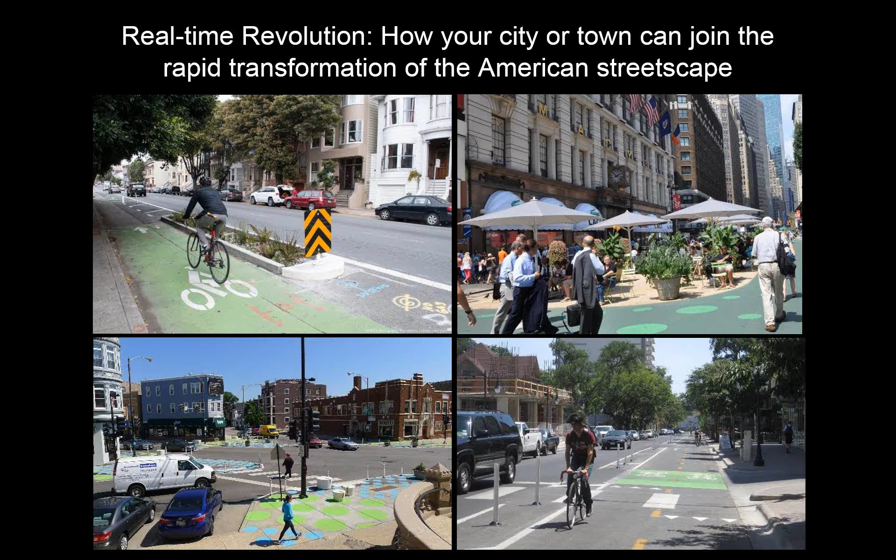One of the interesting things in looking at this phenomenon of using techniques, paint and objects that are easily moved and easily installed, is that it's so new that we don't really have a clear name for it yet. That's one of our challenges in this research.

Some people call it rapid implementation. The New York City DOT, where I used to work, called them operational projects to distinguish them from capital projects. Some of the writing about the public space aspects of it has referred to it as tactical urbanism, which is a catchy name, though I think it misses some of the strategic significance of what cities are doing with these techniques. NACTO's Urban Streets book calls them interim design strategies, which kind of implies that somehow these are going to get built out in more robust ways after the paint and object stage.

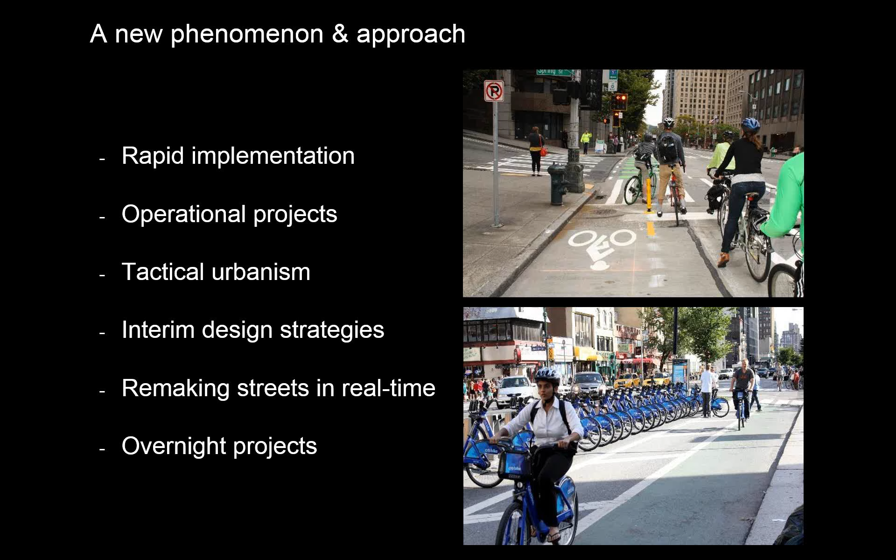I've been using the phrase real-time transportation projects as I've been writing up some of the research, but we haven't really had the conversation and decided what we want to call this so far, whatever quick time frame you want to use. There's a lot of discussion about what to call this, and we'd love to get some more input from you folks who are in different jurisdictions working on these ideas, to think about what we should call this, because it's good to name it, and it can only help it spread and improve as we go. Next slide, please.

One of the interesting things about a lot of this is that it did grow out of many cities' desire to make bicycles a real and viable and widespread form of transportation. And I think that's kind of natural.

In a lot of places, their bike programs were basically a piece of the markings program, because bike lanes tended to be just indicated in paint. But as demand grew and officials realized cyclists in cities need a little bit more than just a paint stripe, these programs started to evolve from simply markings to what can we do to make this more robust and make people feel more comfortable and protected on the street.

And then once that happened, there were cities that said, well, we can actually be doing even more with these kind of techniques - it's not just about cycling. What's also interesting that we're finding is, yes, there have been mayors who've come in, like Rahm Emanuel, and said we're going to make this a bike-friendly city - and the current leadership in Seattle is another example - but there are other ways that these things got started and acquired tremendous momentum in other cities.

In some cases, a mayor may have said, yeah, we're interested in this, but without really realizing or driving it personally, and you get ambitious transportation leadership, as we had in New York in the Bloomberg administration, who took hold of some goals and some openings and then showed real success with a few early projects that convinced the mayor and city hall leadership that this was a winner - and not just politically, but from an objective point of view, with bike ridership numbers going up, crash numbers coming down, and more people demanding these things.

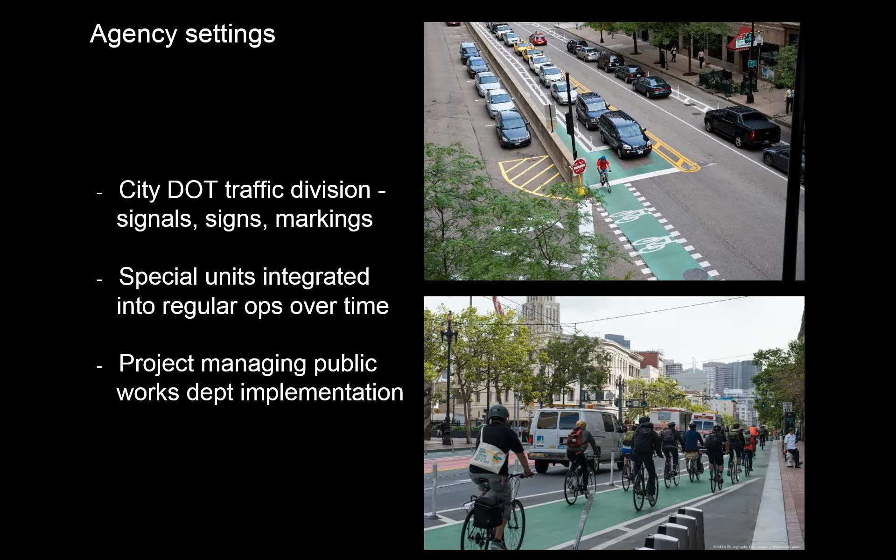Where these projects are coming from, some of these things are now advanced enough that there's a regular rhythm to them. You can see that in New York, Chicago, San Francisco, a few other examples - a regular annual program. These things happen quickly enough that you can go from conception to finished project on the street within 12 months. So you often have people in traffic ops or planning creating the project in the late fall and over the winter, then shifting into project management mode to work with implementers in the spring and summer, and then going back into that rhythm.

It's good because other stakeholders and constituencies in these cities are now perceiving the rhythm. You'll have aldermen or city council members or local elected officials starting to say, oh, we need some of this in our district, and I have some discretionary money in the budget. So you're starting to see synergy as other players perceive this rhythm and understand you can get something fairly quickly in your streetscape, because of the accessibility of these programs and the fact that you can go to realization so quickly.

The variety of sources that project developers have relied on over time - some cities have come up with their own design guidelines in the absence of anything else. But after say 2010, 2011, as the NACTO book started to come out, more cities have gone to look at those things. They don't talk so much about the techniques, which I think are largely still held as knowledge in-house - how to do the paint, how to do quick concrete work and meld it all together. But the geometries are coming now from the NACTO books and from earlier guidance that cities were developing on their own.

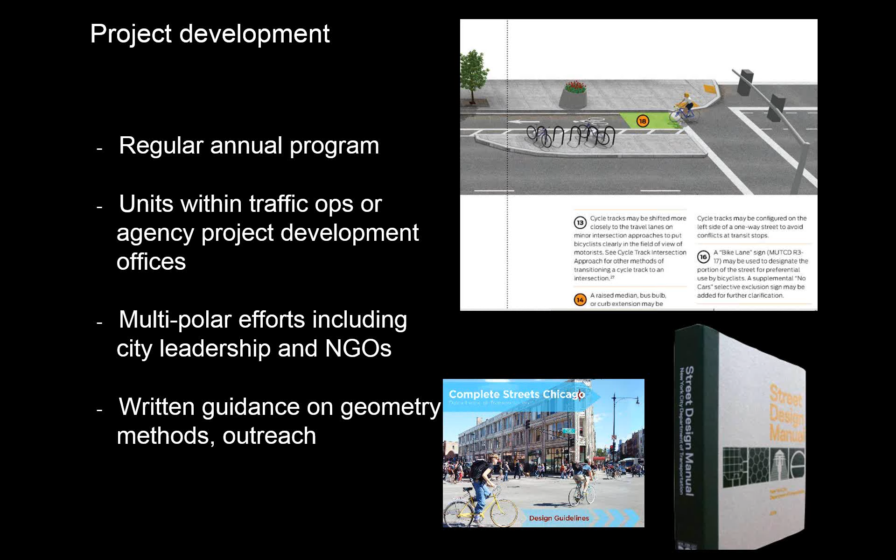When you talk about bike and ped projects in the U.S., you often get into this litany of federal categories we're all pretty well aware of - transportation alternatives, and before that transportation enhancements. Some places were able to use CMAQ funding and other flexibilities built into the federal program. But when you see places doing annual programs with anywhere from half a dozen to 50 projects a year, you see a real variety, and a lot of it is exploiting available local funding that's a lot easier to use than the usual federal categories that bike ped discussion centers on.

In some cases, if you're in the traffic operations area, you can just start drawing from your basic budget lines, like marking signals and putting resources into signaling and marking streets differently. So that's whatever you're using there in terms of local, state, maybe some general federal categories to do those things - you're just repurposing some of that funding.

In other cases, there are monies becoming available as these programs are defined or addressed by leadership. In New York, there was a sustainability category that came along with Mayor Bloomberg's first push on those things in 2007, and that really helped boost some of the cycling and public space projects. Voters in San Francisco recently added a bunch of money for safety, so some of the quick action Vision Zero projects are finding more resources, and the number of projects per year is actually increasing.

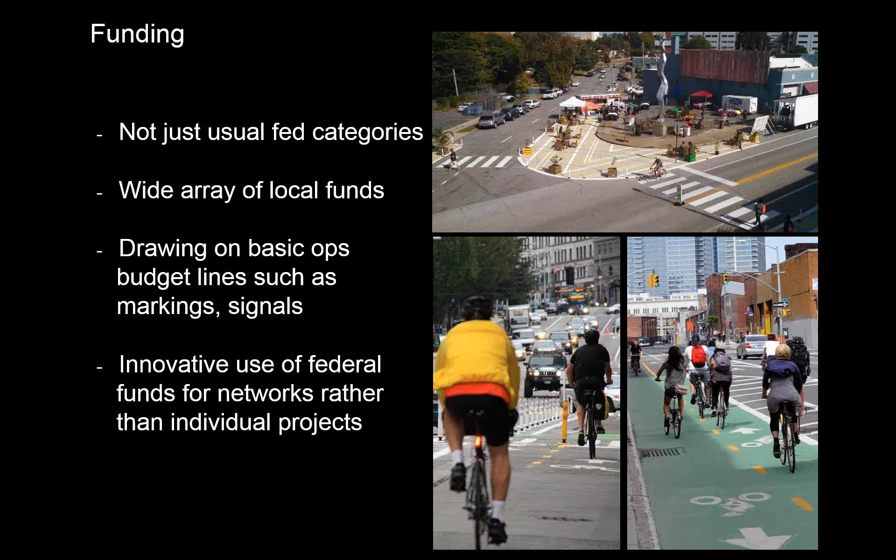We mentioned NACTO calling these interim design strategies, with the implication that these projects will be built out in more robust materials over time.

As a construction project, this is very atypical, not just in New York, but around the universe of these projects. There are places where the paint and object stage is seen as a known phase one that will have a follow-up. But in most cases, it's not given, and cities haven't sorted out a clear timetable or even a clear sense of whether they want to do that, or whether a lot of the bike network will be kept in these operational materials and just refreshed as needed.

There is no lockstep, and there are so many projects being built. It would probably be hard fiscally for the capital pipeline at this point to catch up and accommodate these, absent some major funding steps. So this issue is a little bit all over the map.

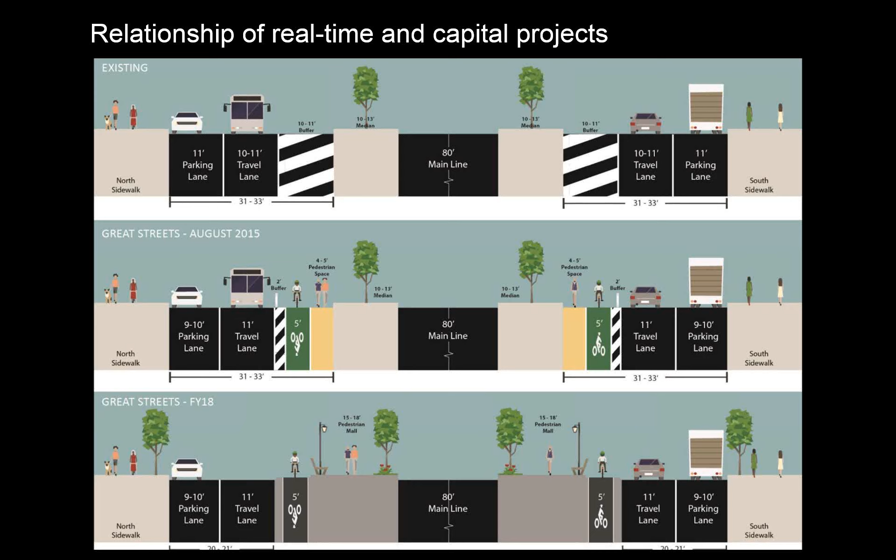This is just one example in New York where there was a capital project coming behind the painted project on Allen Street in the Lower East Side, and you can see the median-side bike lane. On some blocks, it's still paint and cross-hatching; on other blocks, it's a beautiful landscaped bikeway, and that will succeed over time. But again, this is the exception rather than the rule we're seeing so far. I think some places are trying to go fast and get real networks and real safety results down on the ground without worrying yet about how you build all this stuff out over time. So I think we're still in a very pragmatic and early stage in considering these things as city infrastructure and what their longevity might be.

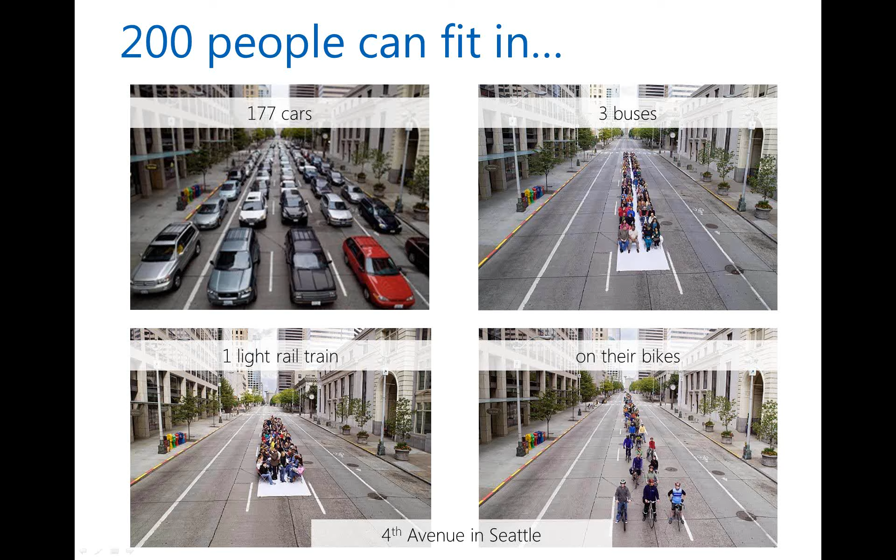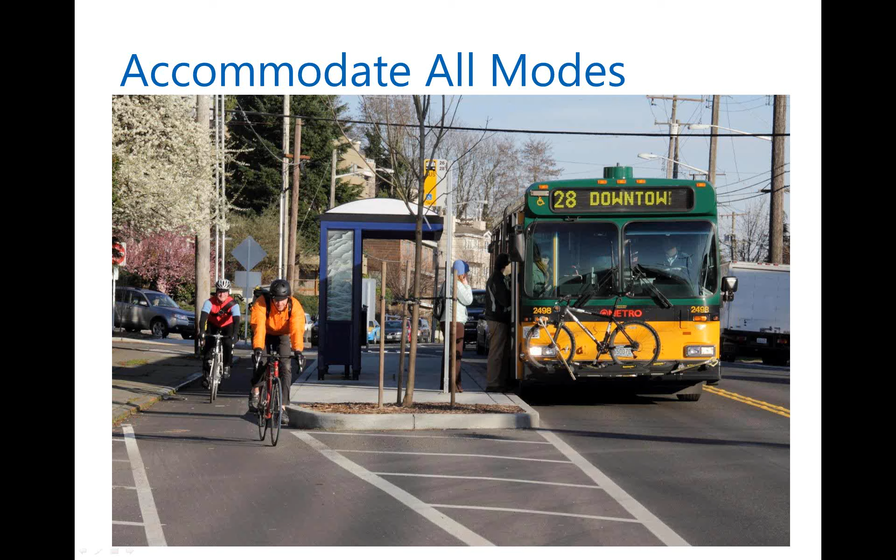We have to be creative about how we accommodate all these modes in a confined space. Here's an example on Dexter Avenue where we've prioritized bus travel on the corridor and provided a pathway for bikes as well, really thinking about flexible use of the right-of-way.

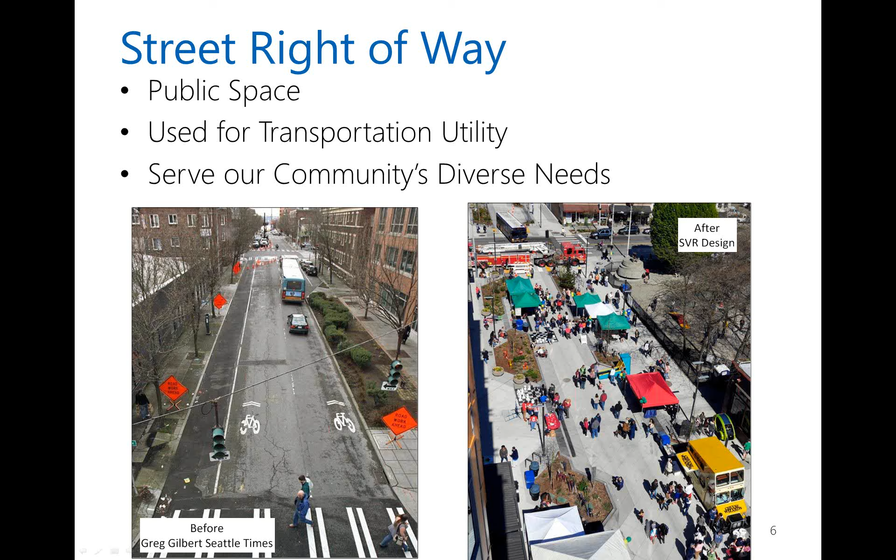This is Bell Street, 4 blocks in downtown, where we need the capacity during the day, but during off-peak and weekends you can repurpose it and use it differently as the community grows and needs space to gather and enjoy the amenities. You can close a block or two to create a different place and have a right-of-way that's really flexible.

Seattle adopted Vision Zero in February, our plan to eliminate fatalities and serious injuries by 2030. We do that through street design that prioritizes safety, engaging the public with education, and targeting enforcement to change behavior. So what's going on in Seattle?

We're seeing a very safe city, one of the safest in the nation for walking and biking, second safest for that. And our collision rates are actually decreasing.

But if you look at serious injuries and fatalities, a disproportionate portion is borne by people who are walking, biking, or riding a motorcycle. Collisions involving those groups represent 5% of total collisions in Seattle, but that 5% represents 50% of the fatalities.

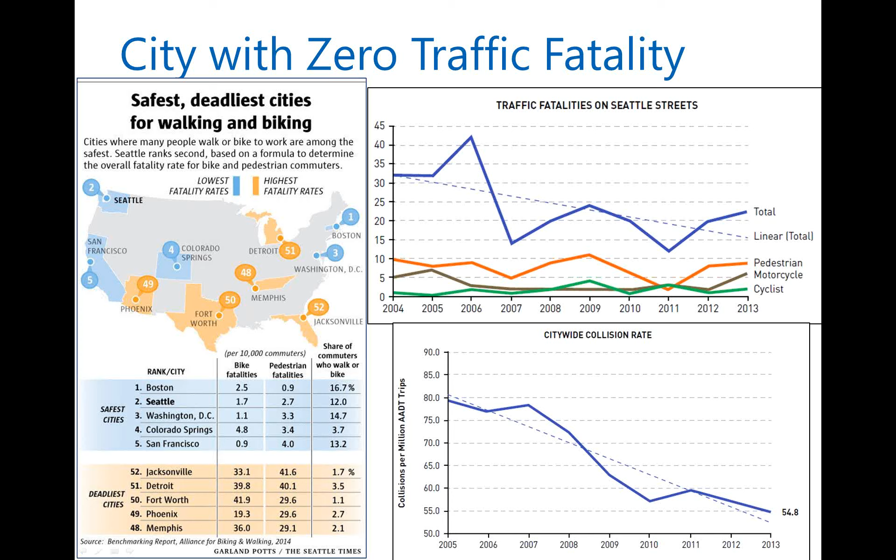So it tells us where we need to look at our data and make a difference in driving that down to zero. So why protected bike lanes? Because the risk of injury drops significantly, 90%, by putting in these facilities.

It encourages ridership, especially among people who want to ride but are wary of heavy traffic. It also creates predictability for everyone when you have a nice facility that's continuous and easy to use.

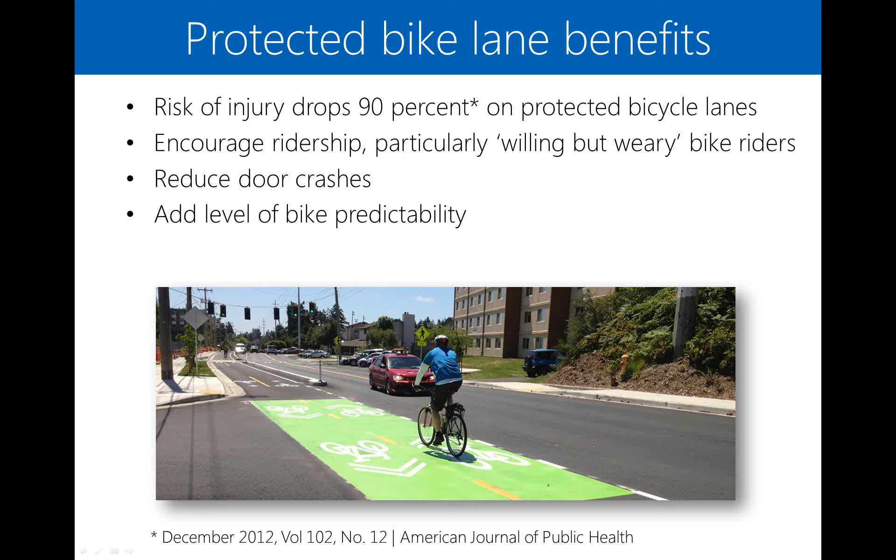As we were doing our bicycle master plan update, we were told by some reasonably polite Seattleites - a couple folks came in the dark of night and gave us a very strong lesson in what we need to consider as we put in our facility.

On Cherry Street, they put some flexible posts in under the state interstate and showed us that with very minimal cost and investment, you can actually make a significant difference.

We took that to heart and worked with our state DOT to create a design we could test out. That same flex post is actually still in place currently, and it's been very robust, it's worked out really well.

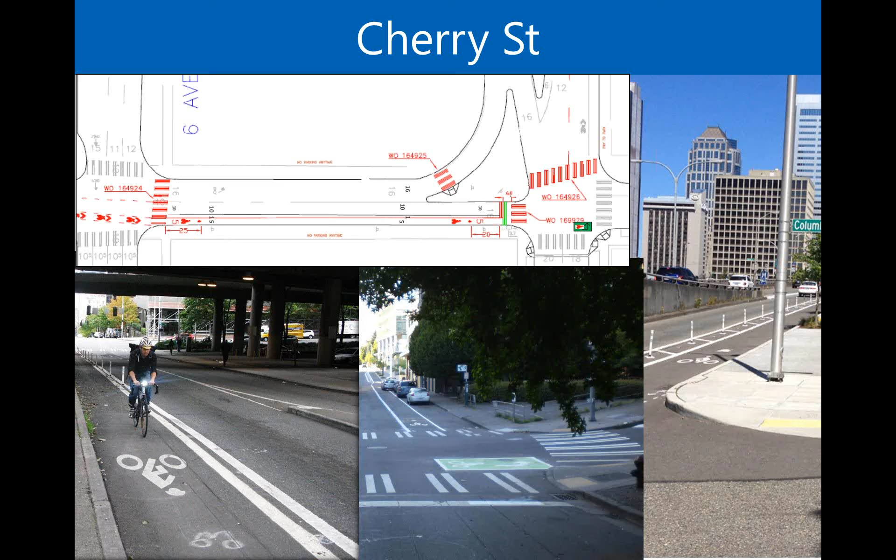We took that opportunity to think further about how to take people on this facility to a safe place. So we created a two-stage left turn box at the interstate on-ramp, with a bike lane that comes into a protected bike lane on the next block over, just to see what a protected bike facility might look like.

We have a bicycle master plan, updated in 2014, that really took the community's voice into our plan - protected bike lanes, residential streets that are calm, low speed and low volume. Those are the facilities the community asked us to put in, and our 5-year implementation plan is doing exactly that, building those facilities.

The funding for most of our bike facilities is currently from the local Bridging the Gap levy, which ends this year. So we'll be going to the voters to see if they'd like to invest in further improvements in the future.

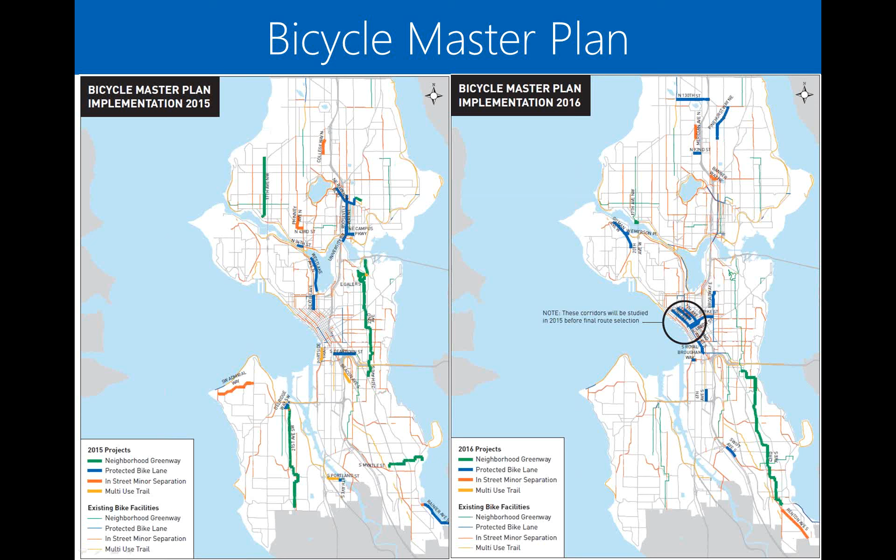We have our implementation plan updated annually online, so everybody understands what projects we're working on and how priority locations are selected, so we can work together to develop a network that's connected, predictable, and usable.

Our second project: instead of flexible posts, we decided to use metal barriers - a zipper barrier we salvaged from a construction project. Our bike plan called for a striped bike lane on this facility that ran from the Burke-Gilman Trail to Magnuson Park.

If you think about families riding on the Burke-Gilman Trail, riding on an on-street facility down this hill onto the park probably isn't the best idea.

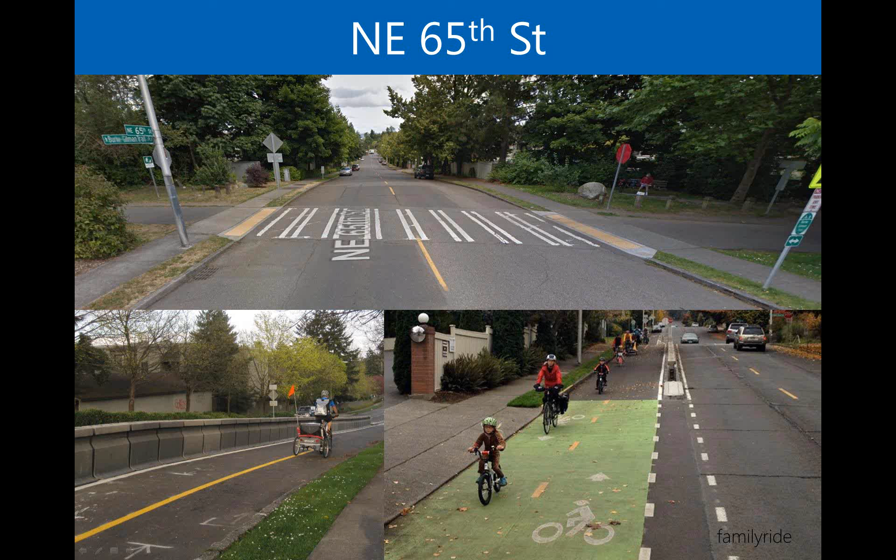So we took the salvaged metal barrier and installed it, and the result is a very comfortable place that's opened up the facility in connection to the parks. This is what it looked like before and after - you can see the crews installing the green bike lane.

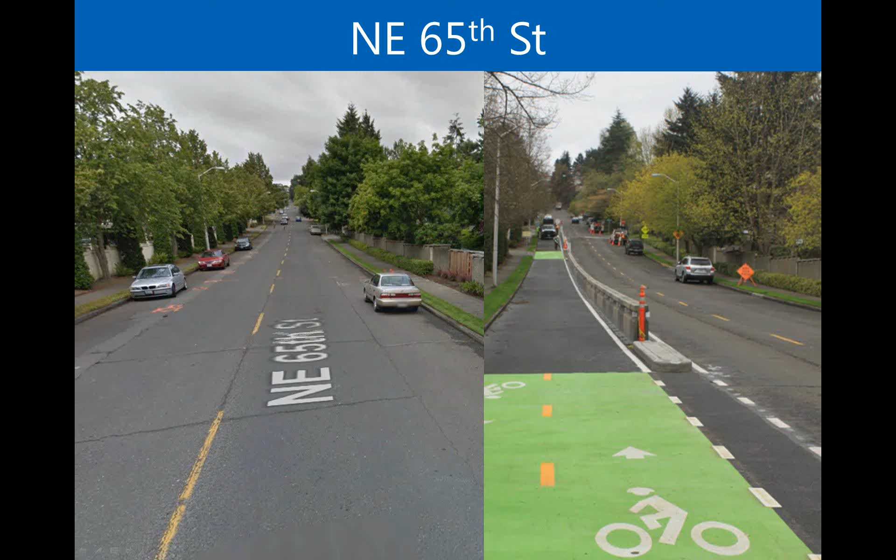It's really about how we prioritize and repurpose our streets. And again, it allows for a larger population of our residents to use this facility.

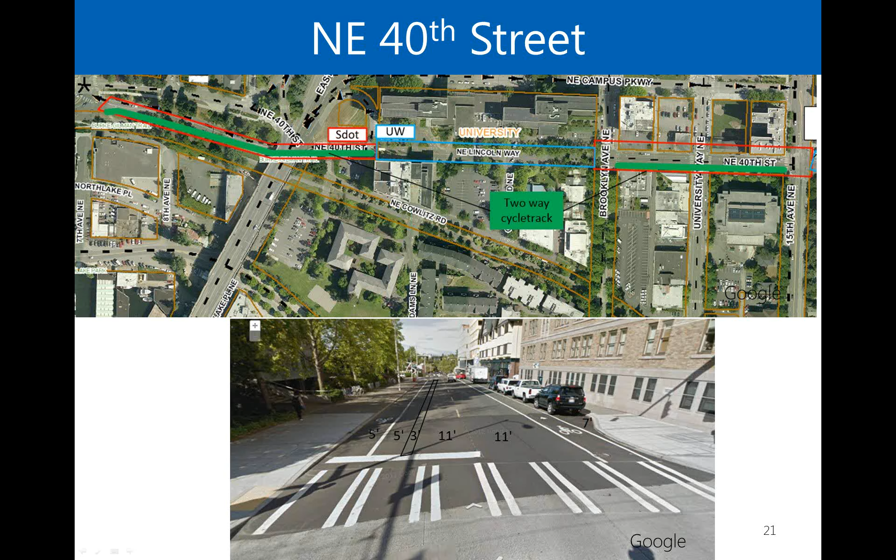This is 15th, where the major campus is, and you can see how congested that location is with buses and pedestrians. So this is the project area. The picture down below is what we did - we took the bike facility and switched it, putting it on one side of the street. We put some fresh pavement down, and at this intersection where the major connection to the university is...

This is tactical. All we did was add a third phase, an all-walk phase. It was a two-phase signal, east-west, north-south, and all the turning buses were turning across all the pedestrians - not the most efficient or best way to handle this intersection. Now, providing this all-way walk, you can see after we turned it on, everybody understood how to use this facility. Much safer, and it's working much better.

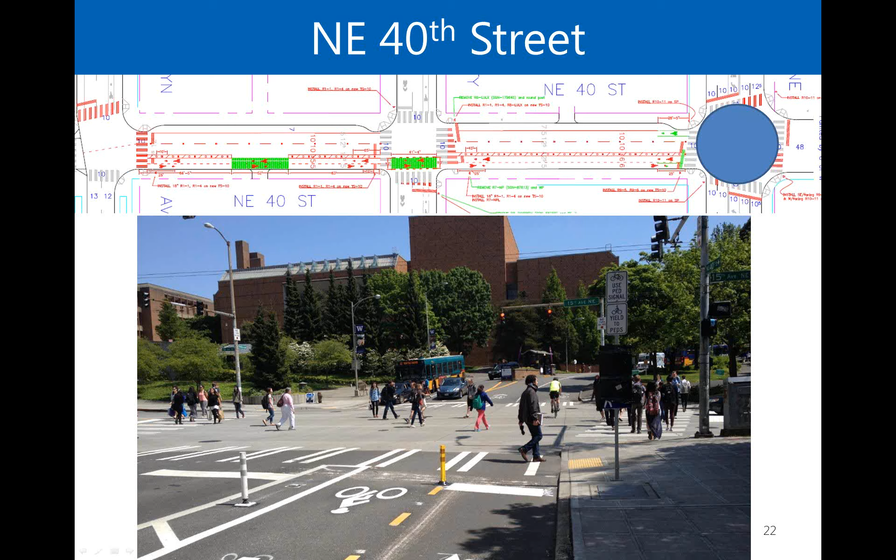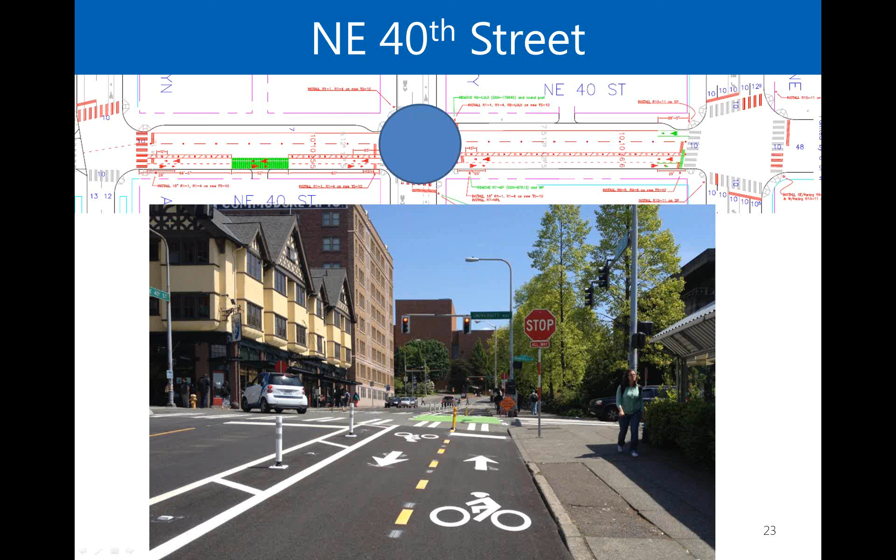This is the next intersection over, where we had a signal, and we took the opportunity to put the signal on flash, pull back the walk heads, and put in all-way stops. Now we've created an intersection that's really prioritized for low speeds and pedestrians - people have the ability to cross very safely.

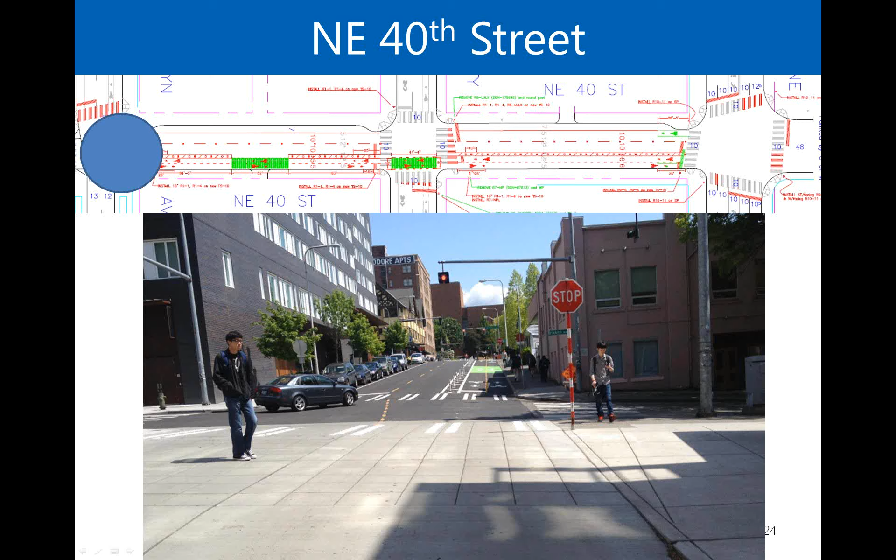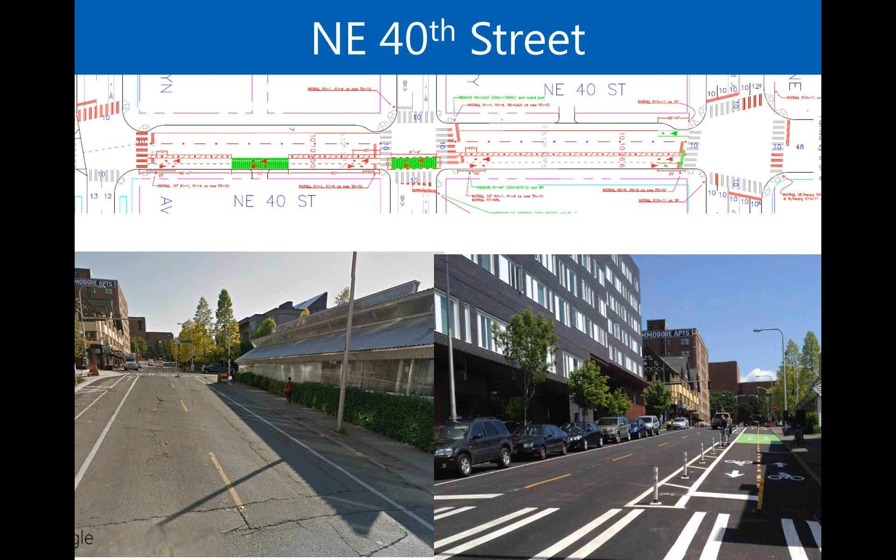This is the far end of the intersection at Brooklyn, where it's again an all-way stop that goes into the main campus housing. Before and after, you can see a huge, dramatic difference - some folks used to cross in the middle of that intersection. Now you create a buffer for people who don't have much sidewalk space, so they're more comfortable not being next to a vehicle lane. And you get these types of riders - kids, families - which is what we want: to encourage and have our facilities available to all users if they'd like to try it.

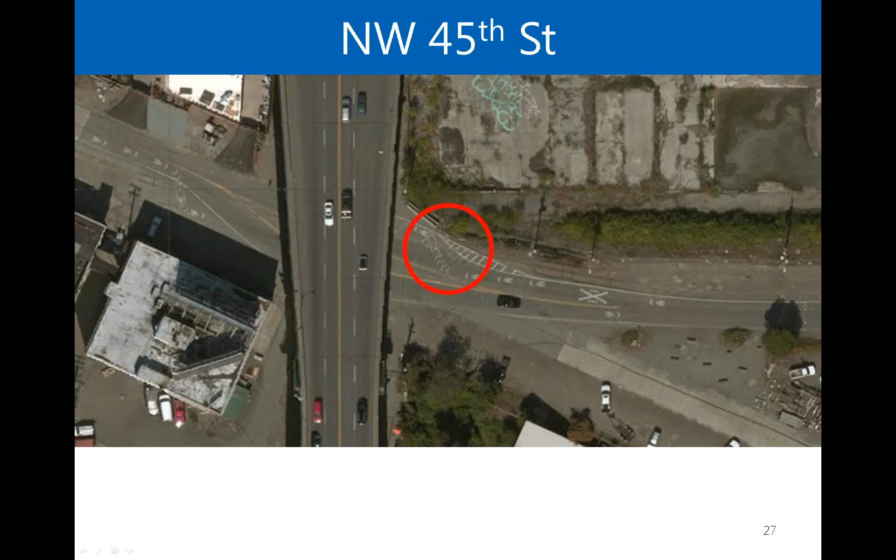This is another location where we had a safety bike fall at a railroad crossing on the section of the Burke-Gilman and Missing Link Trail. We took the opportunity to create a two-way bike facility in the interim, until we figure out how to build the permanent trail facility. So we took a two-way facility and made it a one-way facility, put the bike lane in so that it's a bike path, and we're getting families traveling through that corridor safely.

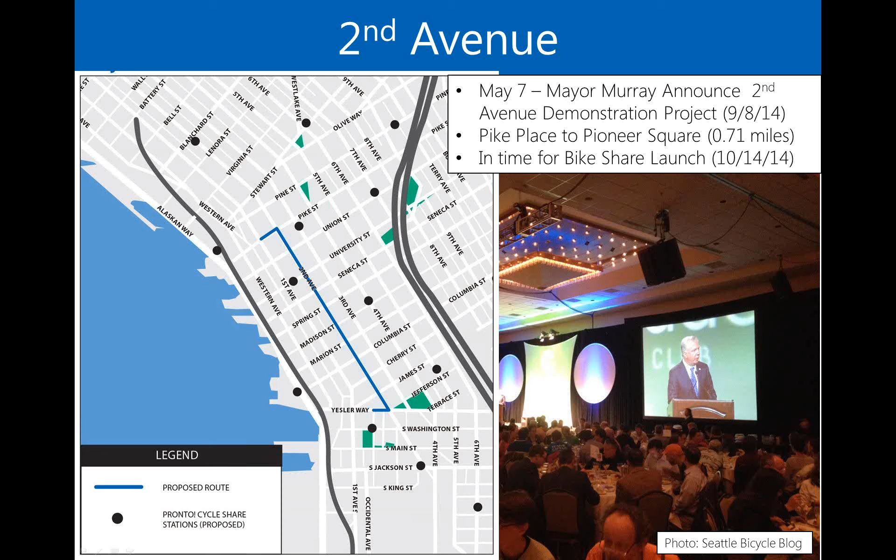On 2nd Avenue downtown, our mayor announced at the Bike to Work breakfast meeting in May that he wanted a protected bike lane in downtown before the bike share opened, which is obviously a big facility for us. So we did this project within a 4-month period - we had it in our 2-year plan. And this is what it looks like. It's a pretty daunting location with difficult turning.

We had 61 collisions. 50% of those collisions occurred at this type of condition, where at the crosswalk there's a left hook.

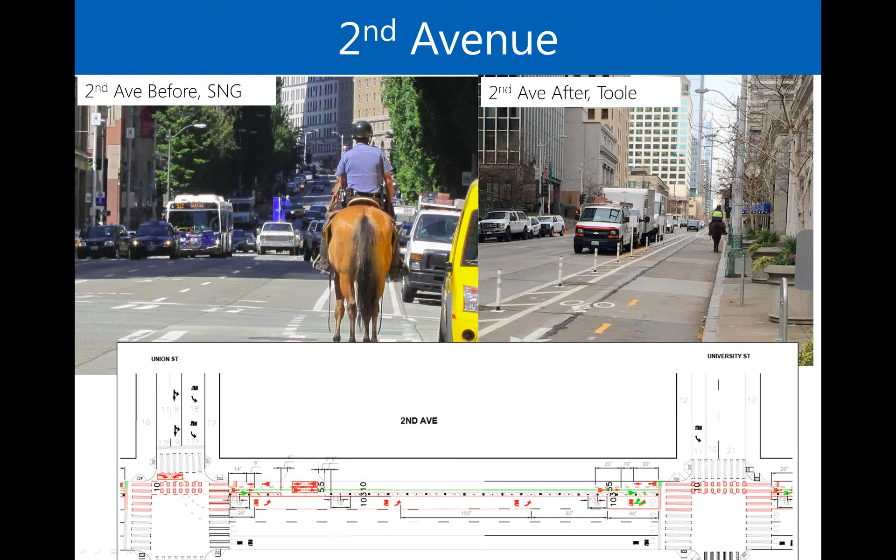This isn't just before and after. You can see a police horse looking up the bike lane and thinking, wow, this is a daunting task. And afterwards, again, just repurposing that space for a better and safer organization of traffic.

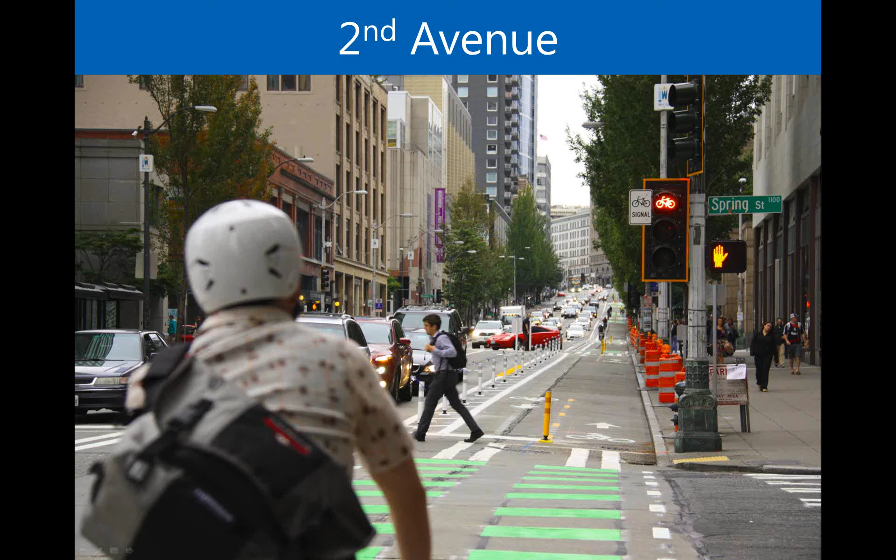What we're seeing is just the repurpose of the street. We're using that curb lane for parking during the off-peak, and then stripping it off during the peak for a travel lane. And I'll share with you the results.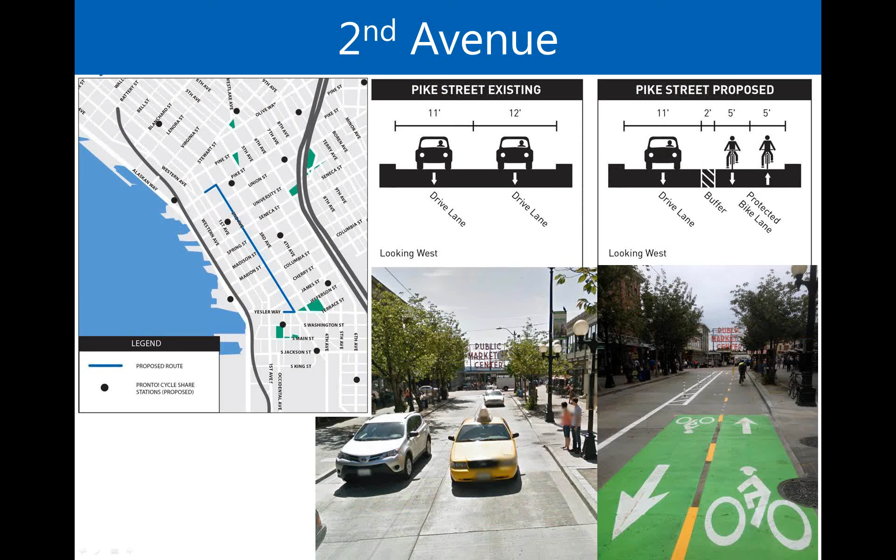At one end of the facility, we're connecting to Pike Place Market. We took the two lanes and changed one into a bike facility into the market. The other goes into our Pioneer Square on Occidental Park, where we took one of the parking lanes into a two-way bike facility. We also made some improvements at the signals, bike signals and left turn lights.

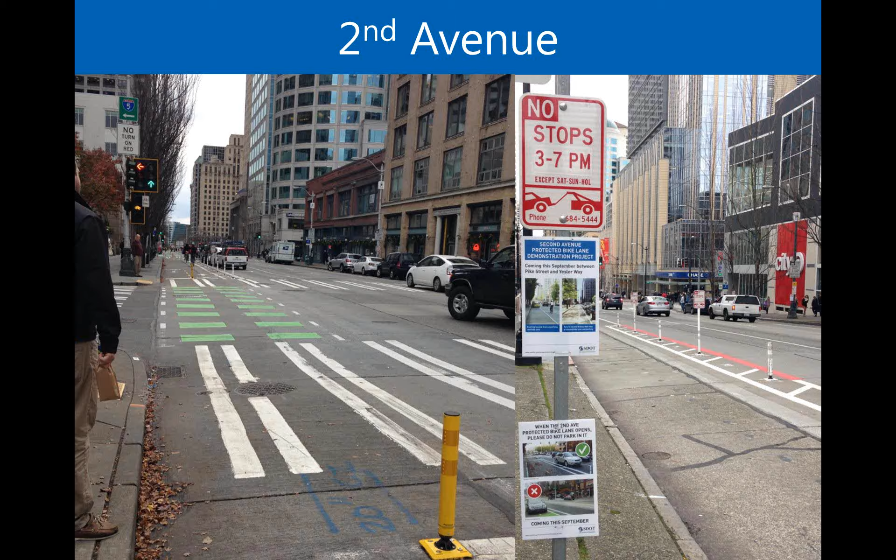This is some outreach that we were doing to get the information out. And the results: we've seen a dramatic increase from 272 bicycle riders to 1,100 in the first week. In May of this year, we had 1,600 bicycle riders, almost a 500% increase in bicycle ridership.

So it's been a very successful implementation. People are using it, and there's been a result on the vehicle traffic.

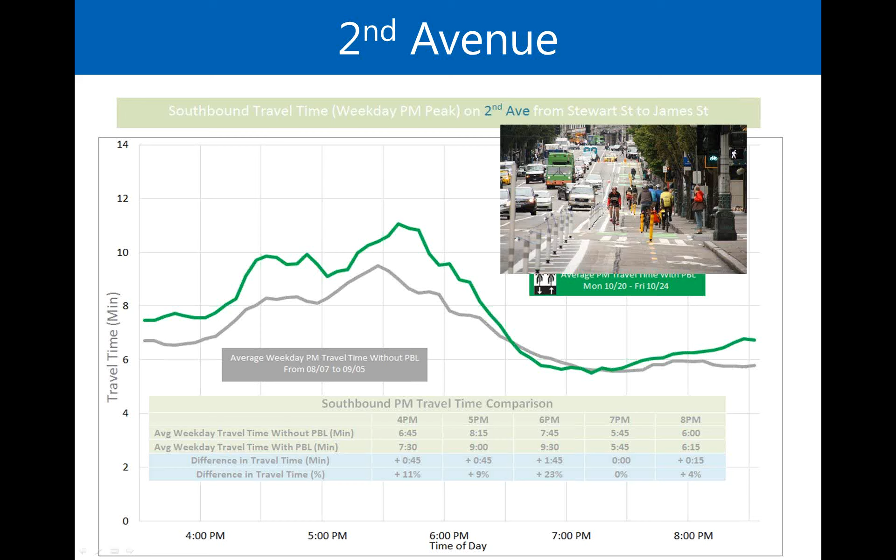You can see the before and after. PM peak is really the critical time for us, where everybody comes out of the parking garages. And the worst of the worst, you can see it's about 1 minute and 45 seconds difference just beyond the bicycle facility. We're looking at the corridor from Stewart to James, and the bicycle facility is only on a portion of it.

So again, it's been very successful. Our bus performance was something we were concerned about, and the data has shown that there's actually been no real impact to the buses.

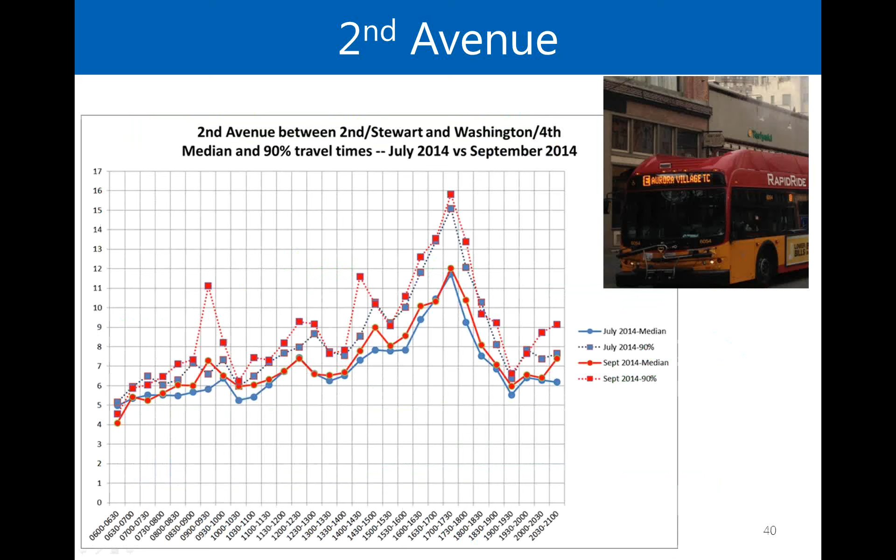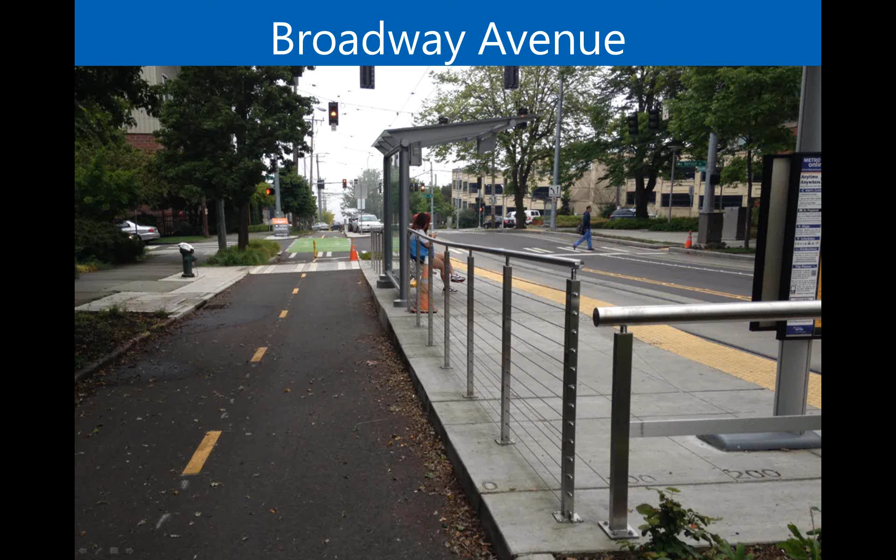And again, it's really about the tools that you have. It's very easy. This is a location in Seattle Center where if you wanted to cross from one corner to the other, it was a very daunting task. We put in a crosswalk on the diagonal and added an all-way walk.

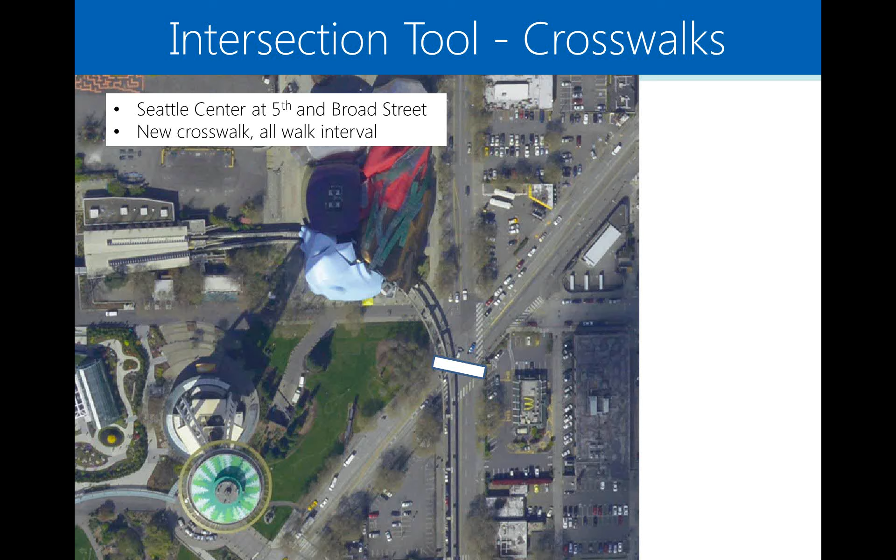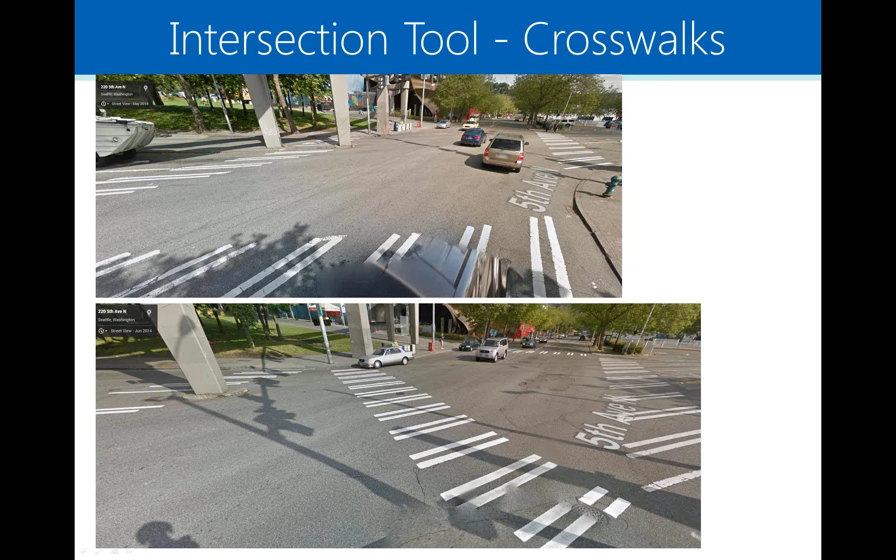This is what it looks like afterwards. Just some striping and a signal phasing change. Definitely a big improvement for pedestrians, and it also helps with vehicles. And again, paint and post—very low cost, easy to implement, and quick.

So that's my presentation.

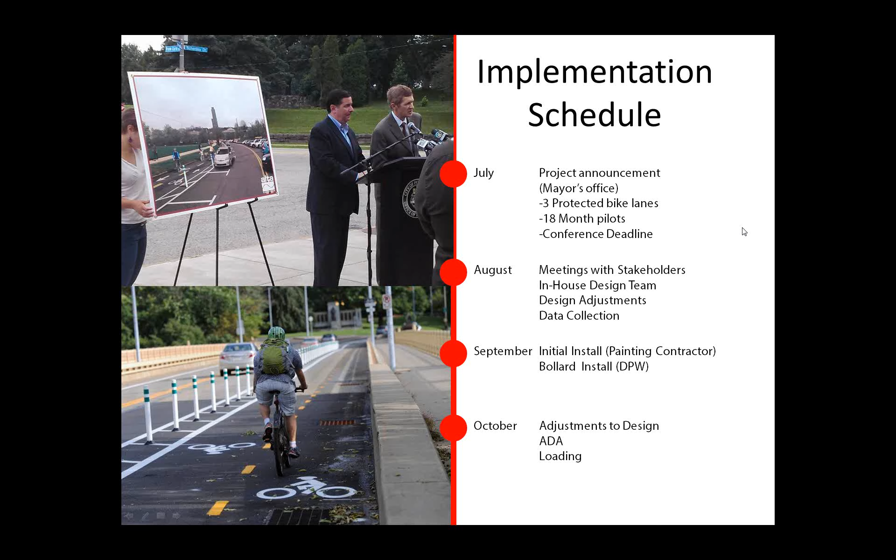So a little bit about how our city works: we don't have a DOT. The cycling work is spread across departments, and we work through something called an Urban Cycling Committee, which is a bi-monthly meeting. The Department of City Planning—I'm there—the Department of Public Works, the engineers, and some of the people that actually build the streets, plus management on that side. The mayor's office policy manager often joins us, and then once a month we're also joined by the county and the state.

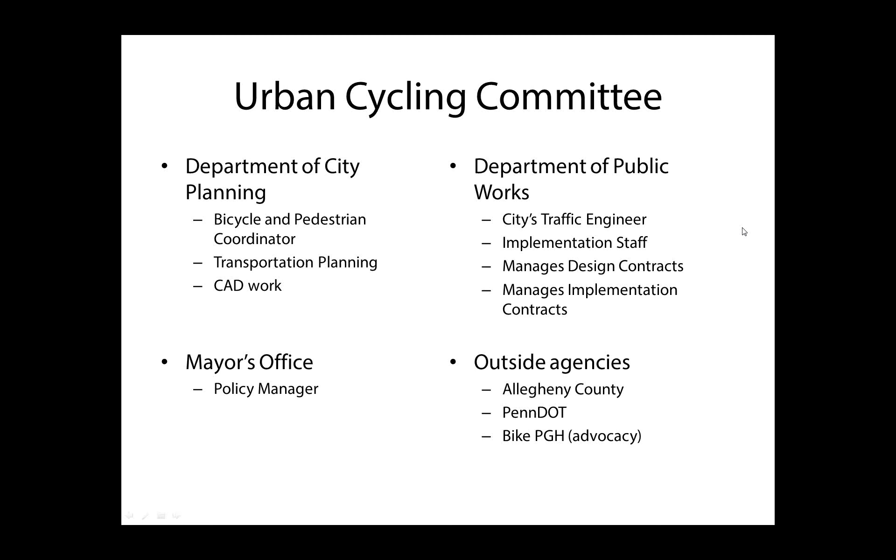Something else that's a little special here is Bike PGH, our advocacy organization, actually started these meetings and provides a lot of almost staffing support. They actually still take meeting notes. So this is definitely a work in progress, but this is currently how we're spread across departments.

So the first project is on Saline Street. Here's a blow up. It's kind of a tiny little connector between two off-street facilities, and this whole path is the most major biking arterial in our city. It goes between Oakland and downtown, our first and second largest economic centers in the city.

So this is an image of the bike lane. We took out a lane of parking, and besides being our first protected bike lane, this was also a small chance to try out these products and something very new for the city and for the painting contractors, to see what we were talking about, which I think was important for the next two projects.

So the second project is actually in a city park, which is a little more interesting because although the road's built, it is all our right-of-way and city property. This lane was built in front of Phipps Conservatory, our plant house. And the most comments we've gotten on this lane, besides displaced parking, is actually the aesthetics of the bike lane.

So moving forward, I feel like this lane might be the first one to get a more permanent treatment, whereas with a lot of the other lanes, I don't think people are quite as upset about the aesthetics of the materials used.

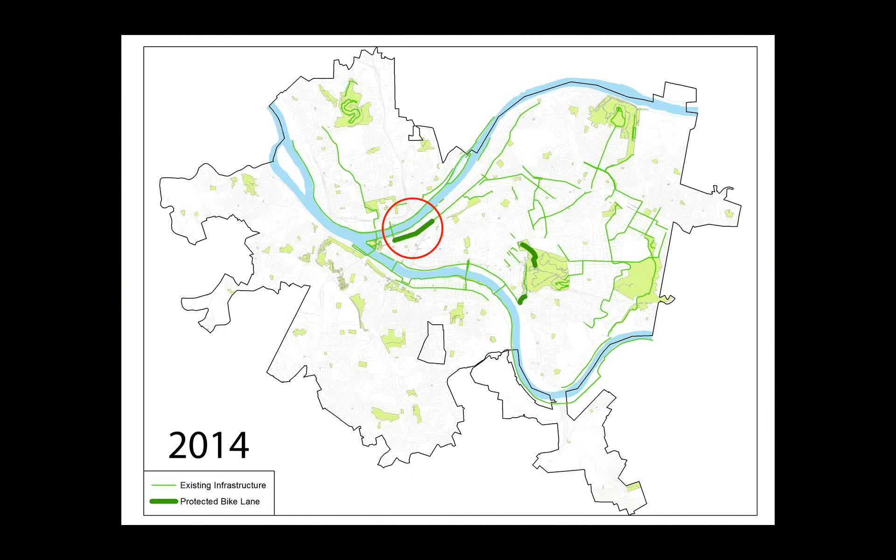The third one is on Penn Avenue downtown. It's a major connector between a large residential area and, of course, our downtown where a lot of people work. It goes from 6th Street to 16th Street into the Strip neighborhood.

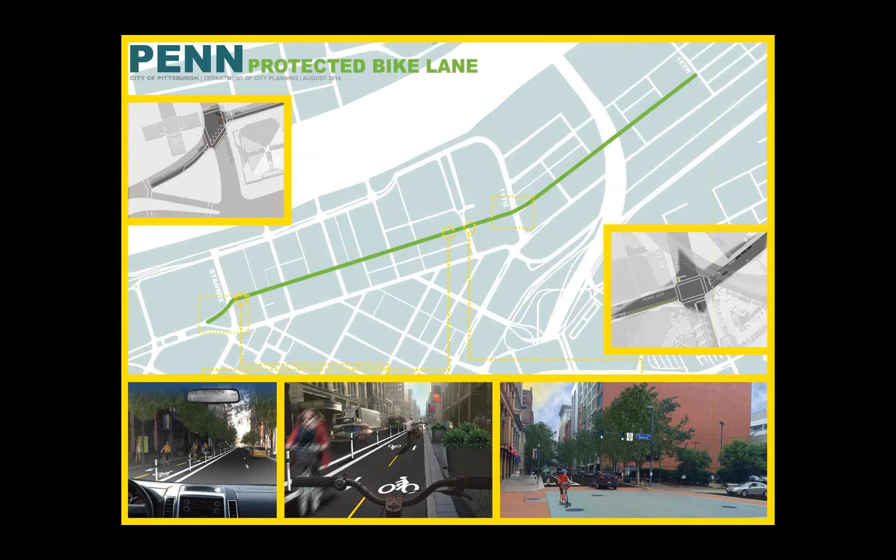You can see it here. We actually took out a lane of traffic. This used to be a two-way street with 2 lanes going into downtown and 1 lane going out, and they changed that outbound lane into a 2-way protected bike facility. I see this guy a lot biking to, there's a daycare on the street at 10th and Penn, right in the middle of the bike lane.

Here's another image, this was just last night. Because we changed the configuration of the street, all the bus stops are actually on the right side, so we didn't have to deal with any of those.

Here's from our last open streets, a couple pictures from just this weekend where bikes are spread out all over the street, but you can see the facility. A lot of the largest comments are that people don't see anyone in the bike lane, so our Pittsburgh Downtown Partnership was really quick to buy automatic counters, and we have 3 of them across this bike facility. It shows us how people are using it.

A lot of people are turning south to go into downtown, as you can see, but we had 24,000 trips in the month of May, and that's remained pretty consistent over the summer.

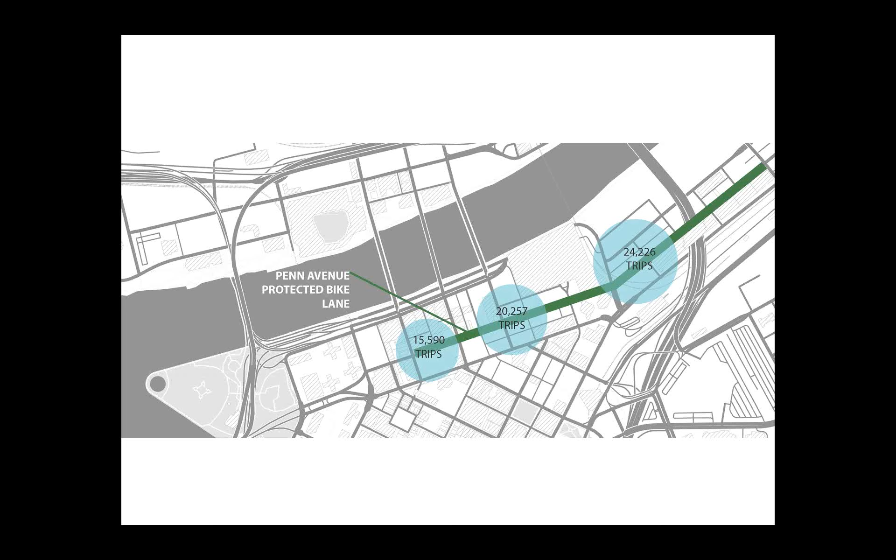I think because these were implemented so quickly, there have been quite a few changes we've made to the bike lane after implementation. Part of it's a learning curve for us, but also because there wasn't always time to work everything out beforehand.

So one of those changes is we added a turning box, you can see that in the right-hand picture, to kind of get into the facility. And we've also widened the buffer in one area, on the left-hand photo near a handicap parking spot, to provide that 5-foot turnaround.

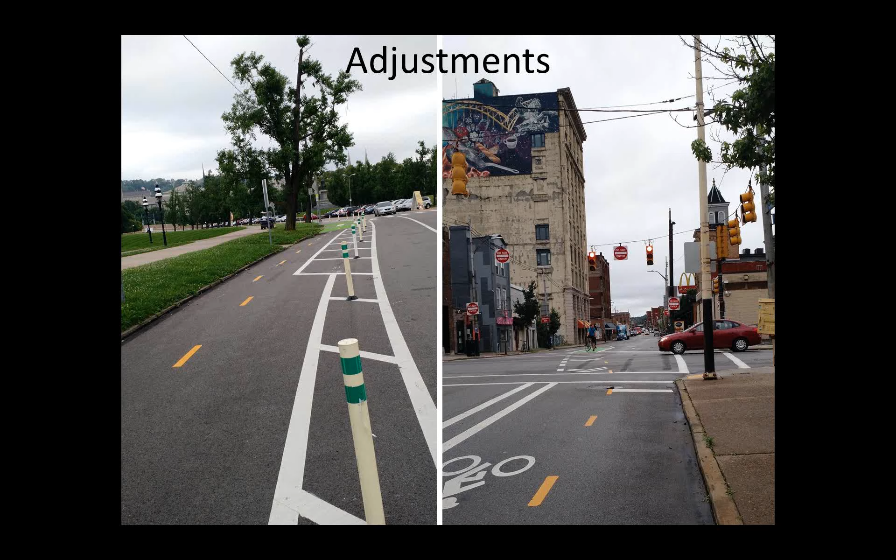Some of the work that's had the most impact is actually our partner agencies at the state and the county. The county actually owns and maintains all of our bridges in the city, and this is an image from the Roberto Clemente Bridge. The county decided to put a protected bike lane on this bridge, and they had a custom bike symbol made up, this is Roberto Clemente himself. You can see the Pirates baseball stadium in the background.

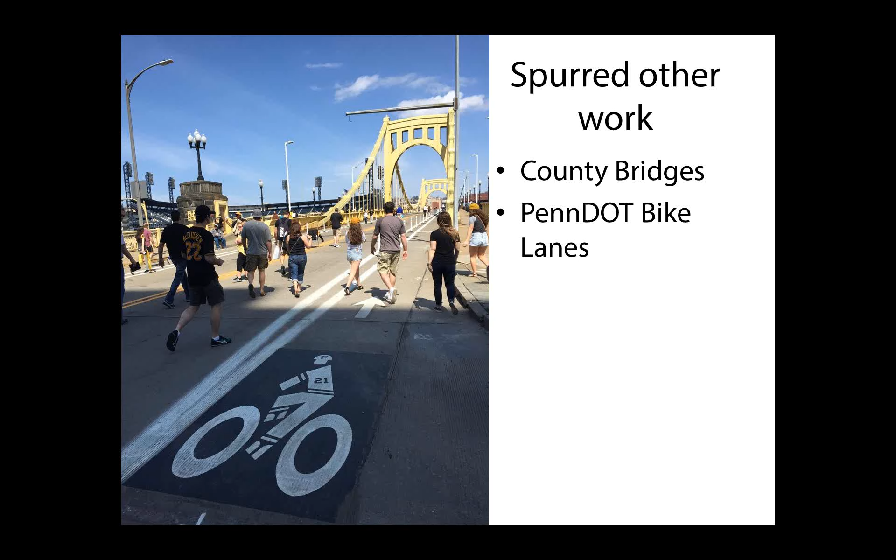So some of the changes in process - the first one is just because we're a small outfit, to get these projects done so quickly last summer it was really an all hands on deck approach where a few people had to drop a lot of the things they're responsible for to focus on these bike lanes for a couple months.

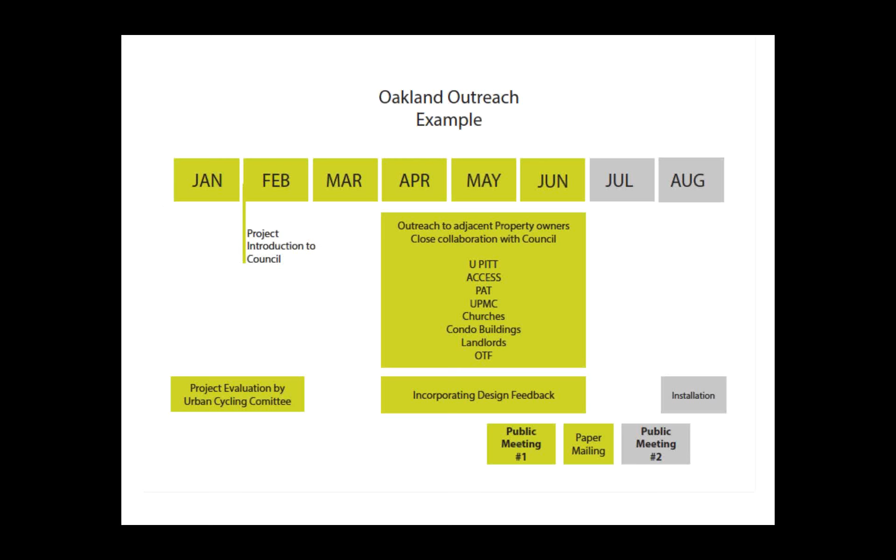There's also been a focus on outreach. We've heard from the administration, and we also feel ourselves that we can't skimp on some of the outreach. So the lanes going in this year have required a much more coordinated and published approach to outreach.

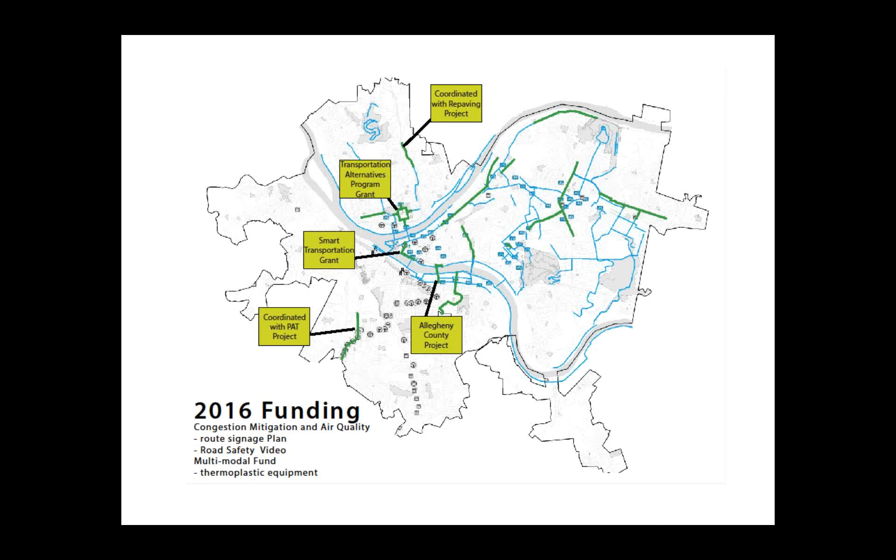Another thing that's changed is the funding. The 2014 lanes were funded by foundations, and in October 2014 we applied for a couple of grants we thought we'd implement this summer, but because of the long process with the state and federal government, we're waiting until next summer. So there aren't any new protected bike lanes going in this year - we're extending some existing ones, but we'll see new ones next year, based just on funding.

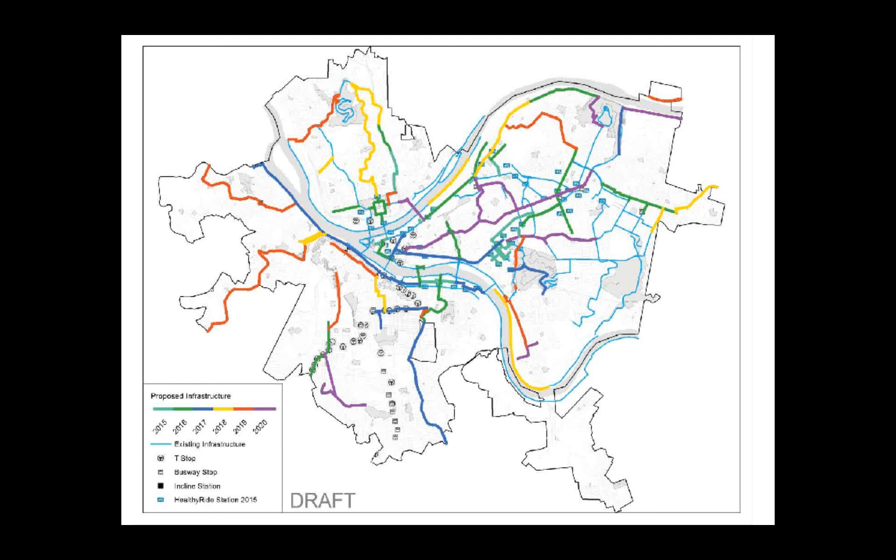The other thing that has really changed is that we see the need to provide a bike plan. We didn't previously have one, and if we're trying to tell people this is important, we need to show them where we're taking them. This is a quick glimpse at a pile of spaghetti right now, but we're working on a 6-year bike plan, and it's really exciting to take it out and show folks what our long-term vision will be.

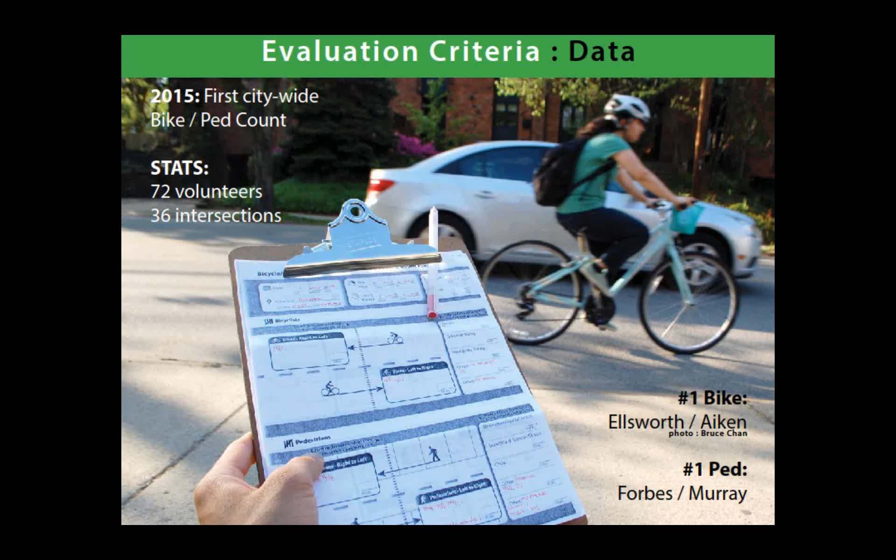We've also really upped our data collection this year. We did our first citywide bike ped count - we were able to count all over the city with volunteers. This is a manual count.

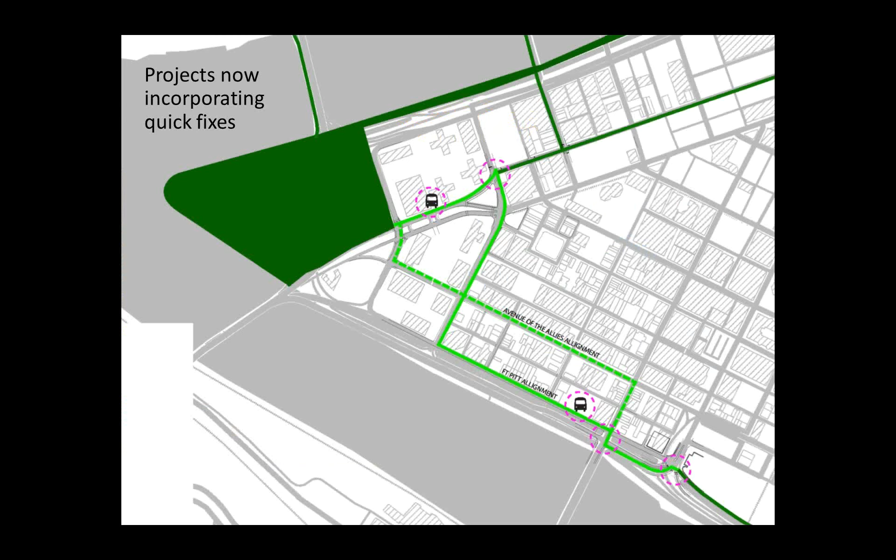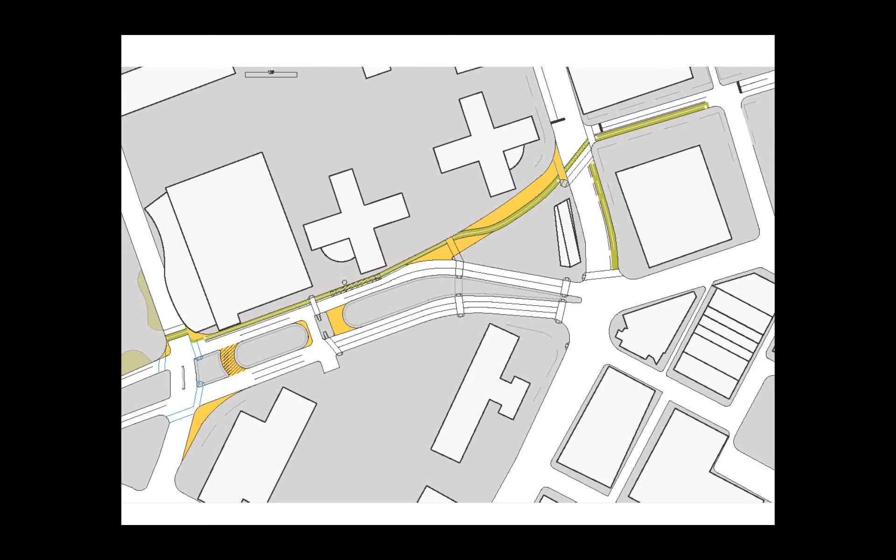The other change is that with all of our projects now, we're looking at ways to change those curb radiuses and make the areas much more pedestrian friendly. So they've no longer become singular bike projects - every project looks at all modes and how to make them safe and clearer to the user. This is another example where we put sharrows on a street, but not only sharrows, we also put curb bump outs.

And that's it. So please let me know if you have any questions. Thanks.